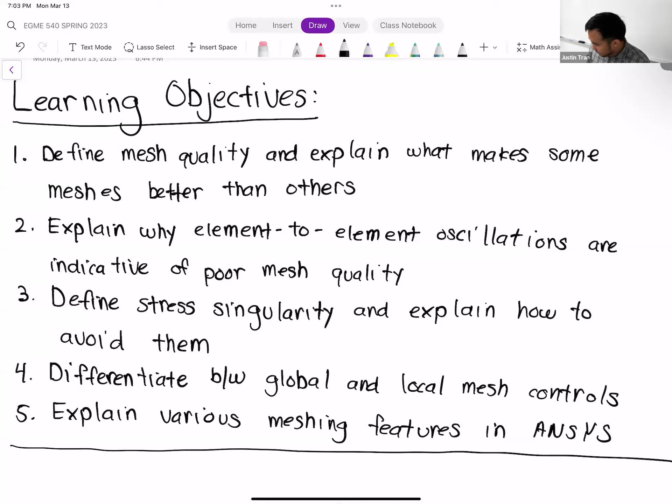Okay, let's go ahead and get started with the lecture. So today we're talking about advanced meshing.

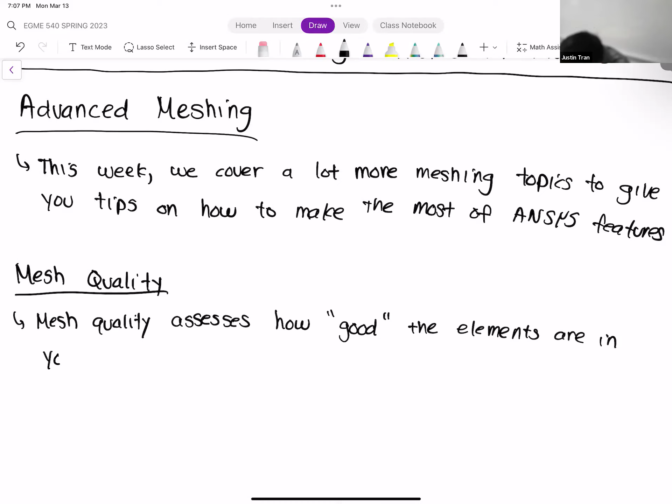Mesh quality is a metric used to assess how good each of your elements are. It's an element by element metric—when you mesh a geometry, you produce thousands and thousands of elements, and each of those elements gets a score of how good it is. Generally speaking, you want elements that are roughly equilateral in shape, with dimensions that are roughly the same in all directions.

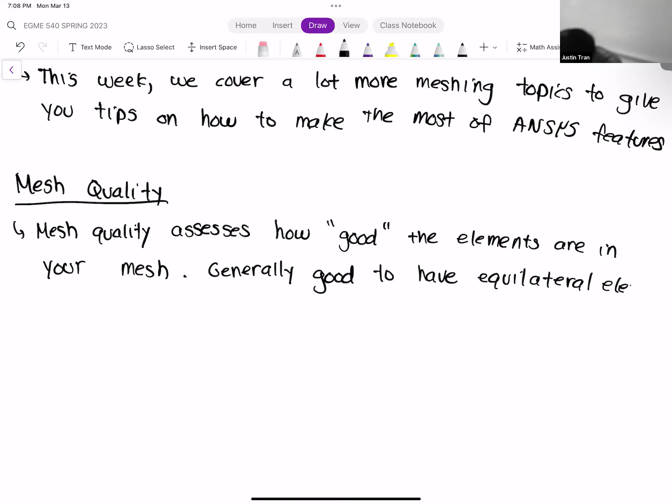So generally speaking, if we look at a 2D triangle, you want one that looks like this, where all the sides are about equal length and all the interior angles are about the same as well. My drawing is not high quality, I can't draw straight lines to save my life, but this is a high quality shape of triangle.

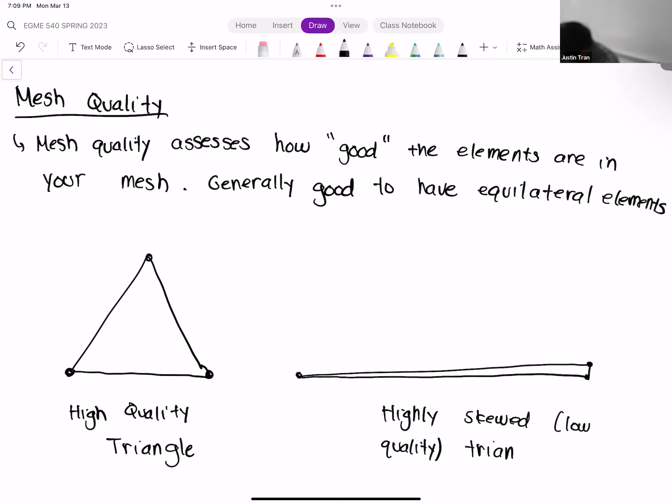And if you compare that to a very low quality triangle—we've already seen this—you may have a triangle that's highly skewed, something that looks like this. This is a highly skewed, low quality shape. The way we assess the quality of our elements is through a metric called skewness.

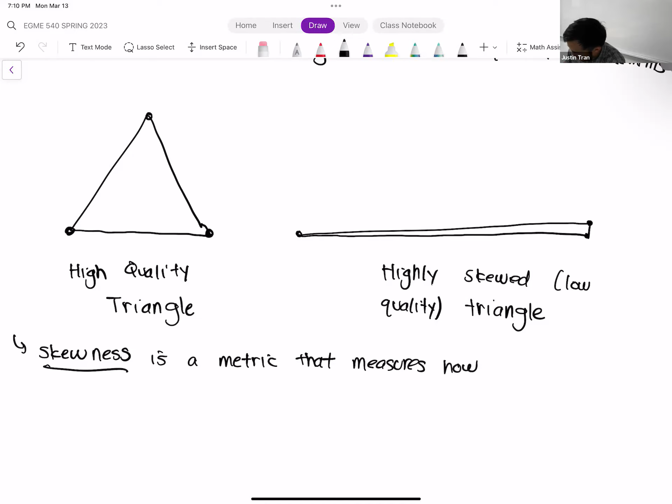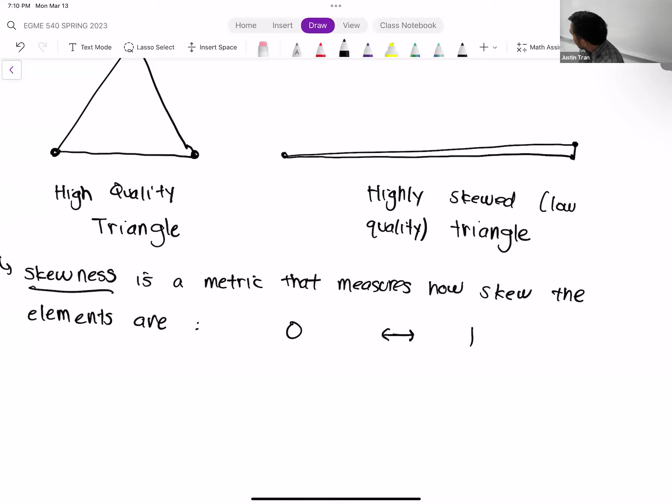Skewness varies from 0 to 1. A skewness of 0 means that your element is not skewed, so this is high quality, versus a skewness of 1 means that the element is highly skewed, generally low quality.

There are benchmarks and thresholds that people like to hit in terms of skewness. In ANSYS, they tell you the maximum, the minimum, and the average skewness. Different people have different opinions on the threshold for these. Some people say you have to have an average skewness less than 0.5, and a maximum skewness less than 0.95.

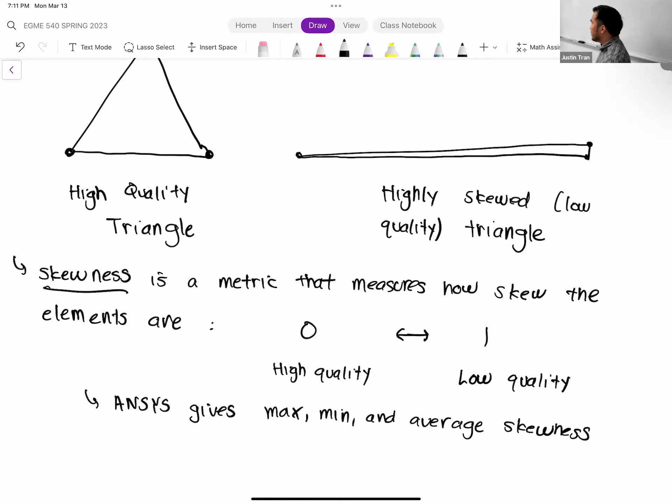The real answer, and I do have some numbers in the notes as well, is that the amount of skewness in your elements depends a lot on the mesh settings you apply and how good you are at applying them. But a lot of it also depends on the specific geometry you're looking at.

If you have a highly irregular, highly complex geometry with lots of curves, and you can't really do anything about that, you have to model all of it, so some skewness is going to be inevitable. You might have an element with a skewness of 0.99999, and you might wonder what to do about that. You might even have an average skewness that's over 0.9.

That's okay. It's fine to have some highly skewed elements, and on average it might be okay too. Skewness is not really a black or white test - it's not something you can use to just invalidate a mesh or say the overall mesh is bad. It's just a metric to tell you how your mesh is doing. If you're looking at your simulation results and seeing behavior you may not be expecting, skewness may be something you have to look at.

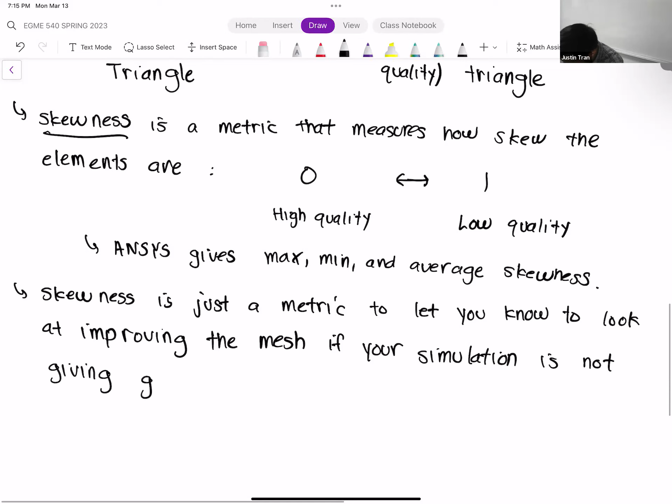So you may be asking, how do you know if a simulation is not giving you good results? I'm leaving that term vague on purpose, because a simulation not giving good results can mean a lot of different things. I want you to start looking at your simulation results and recognize certain patterns. If you recognize some of these solution features, maybe you should look at your mesh. That's what we're going to look at next.

The good thing about ANSYS is that, especially for a steady simulation, it's not that expensive to run. The most expensive simulation we've done in this class might have taken about 5 minutes, and in the grand scheme of things that's not long. So you have a lot of freedom to try a simulation, see how it runs, look at the results, and then go back and refine the parameters. That's a luxury you should take advantage of, especially when learning finite elements for the first time, because a lot of computational work comes down to experimentation. But you can't experiment without knowing what to look for or how to assess your results, so that's what we're going to do.

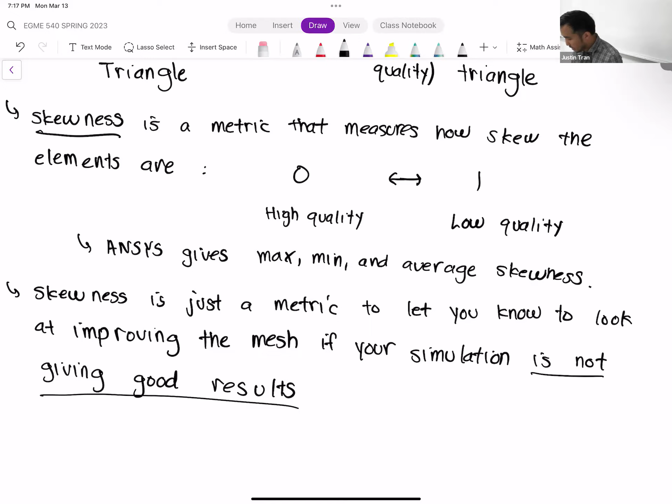So how do we assess whether or not our finite element simulations are good? One thing I always check in my finite element results is the results of my derived quantities.

Remember, derived quantities are solutions or things that come out of your finite element simulation that may not be computed right away. These are things computed based on the original solution.

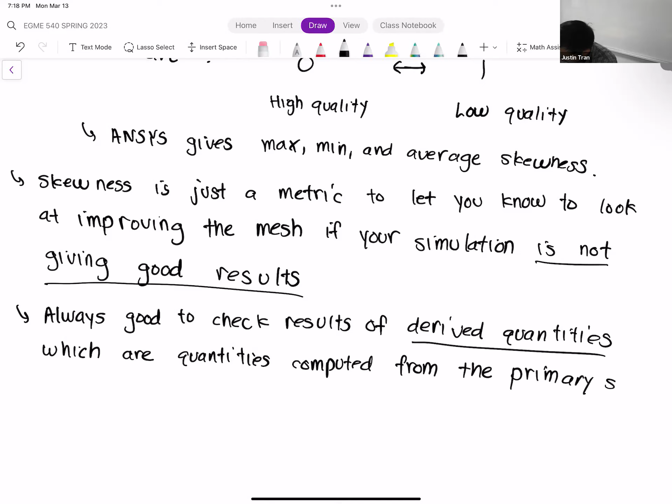The prime example of this, and the one we work with most in this class, is stress. Equivalent stress, principal stress, it's all the same, so you can check any of them. Strain is another good one.

If you're doing a thermal simulation, a good derived quantity would be heat flux or heat transfer rate. If you're doing a fluid mechanics simulation, you might look at shear stress, something like that. What's significant about derived quantities is that they're computed based on the derivative of your primary solution.

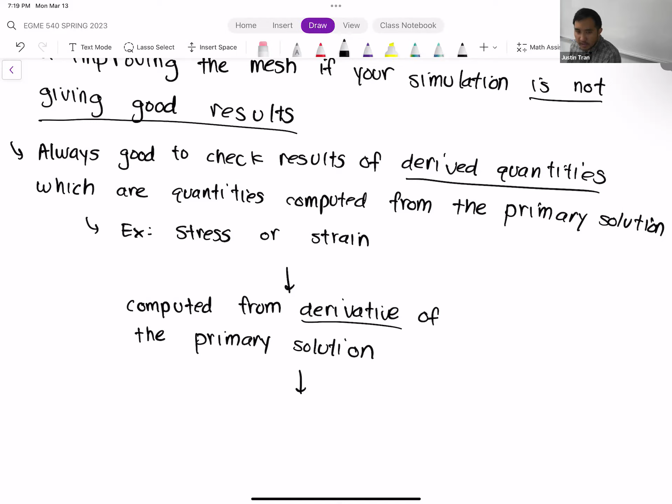The way derivatives are normally computed, it's not exactly like this within ANSYS, but it gives you the right idea, is with something called a finite difference.

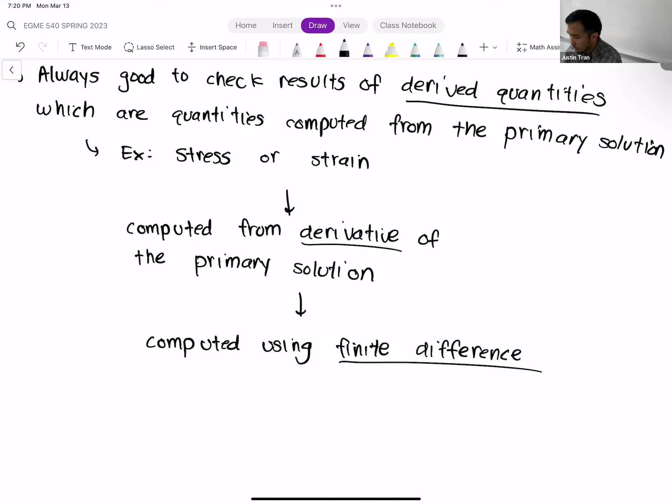The way finite difference works is that to compute a derivative, you basically take the difference of two solution values divided by the distance between the nodes. So let's say we have an element with nodes 1, 2, and 3, and I'll use temperature for now to keep things easy. Each node has a temperature associated with it: T1, T2, T3. Let's say this distance is L1, this distance is L2, and this distance is L3. Now let's say we wanted to compute the derivative dT/dx.

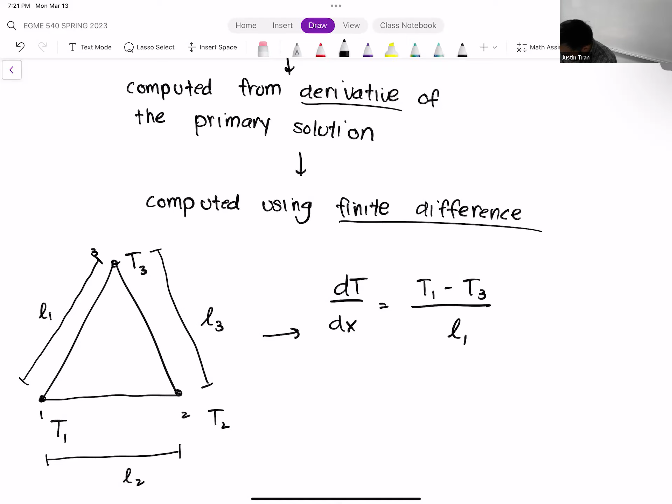The way we compute this is through a combination of the nodes in this element. So we do something like T1 minus T3 divided by L1, taking the x component of this, plus T3 minus T2 divided by L3, plus T1 minus T2 divided by L... it's not exactly like that, but you get the idea. Generally speaking, when you compute a derivative, you take the difference of the nodal solution values and divide by the distance between them.

Dr. Tran, is this the only method that ANSYS uses to compute the derivatives, or are we allowed to change the methods, such as from finite difference to finite volume? Or is that just instilled in the software, the finite difference method?

Yeah, it's not exactly like this, and ANSYS definitely uses a more sophisticated method, but I'm using this as an example to show you, because I'm going to tie this back to skewness and why skewness has an issue with this. So ANSYS definitely uses something more sophisticated than this, but this gives you an idea of what's done.

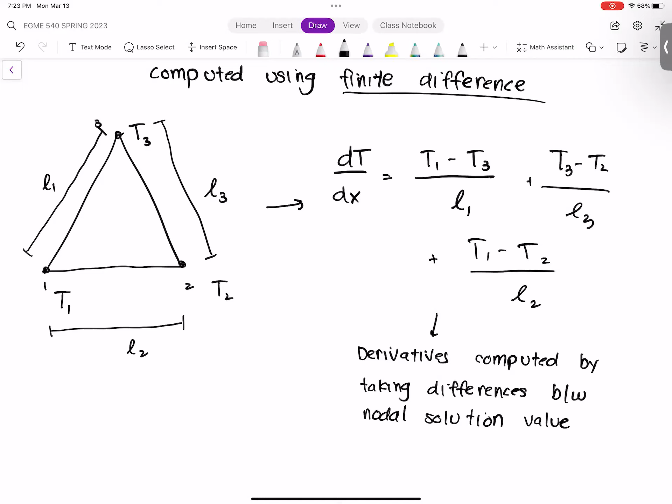Sounds good. Yeah, it's probably in their manual somewhere, and there's probably something you can change within the ANSYS interface itself. I'm sure they have a couple of different methods for it as well.

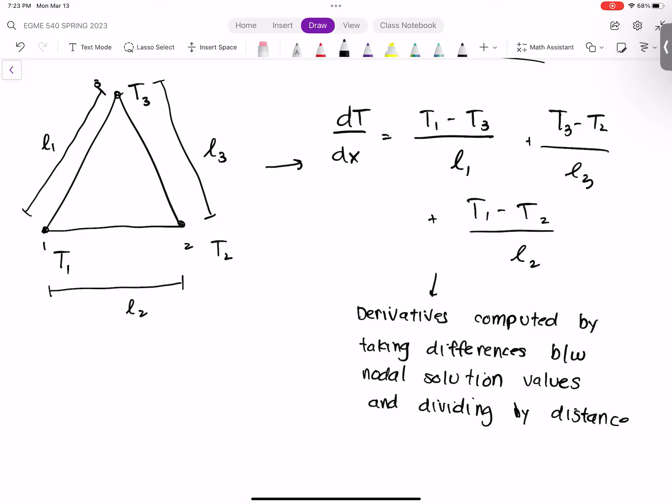The important feature I want to highlight here is that whenever you're computing a derivative on an element, each of the nodes should ideally contribute equally to the derivative. That's why it's important to have an equilateral element, because then each of these terms will have roughly the same magnitude, so they're roughly the same contribution.

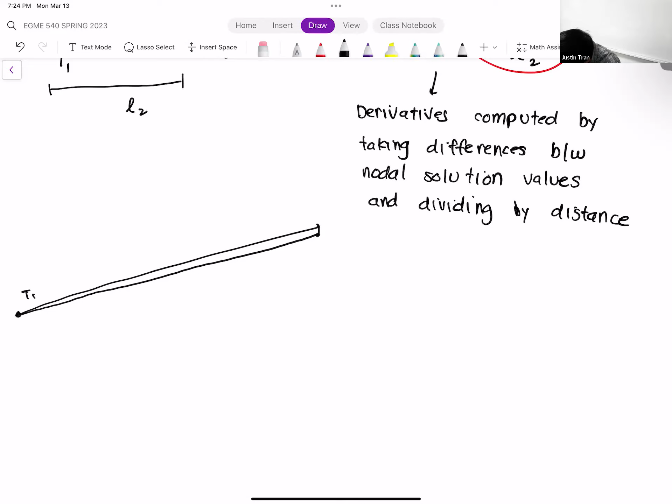If you have a highly skewed element, we compute distances as well. So let's say this distance is L1, this distance is L2, this distance is L3. For a highly skewed element, you have some lengths that are significantly bigger than the other ones.

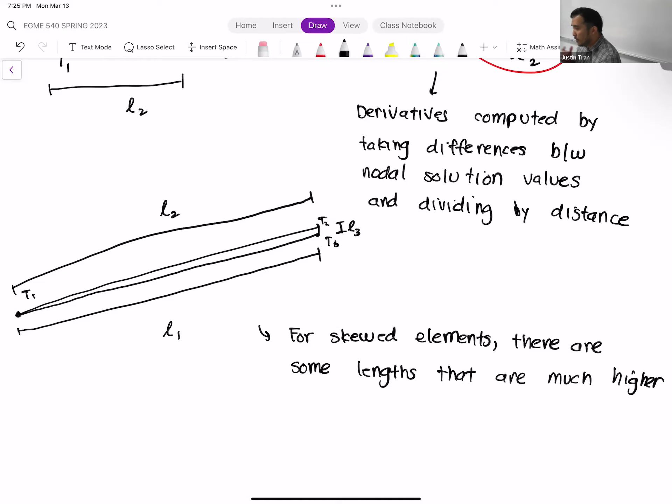Thus, when you compute the derivatives on these elements, you're going to have a very lopsided affair. If you're going just based off the distances, since L3 here is much smaller than L1 or L2, any derivative that involves L3 is going to be much higher in magnitude, because L3 is in the denominator. In certain situations, that's going to dwarf any contributions for T1. So any derivatives that involve T1 are basically going to be non-existent, because its derivative is going to be much smaller.

And that's not good, because if you're computing something like a derivative, you want to make use of all the information that your element has to offer, in general.

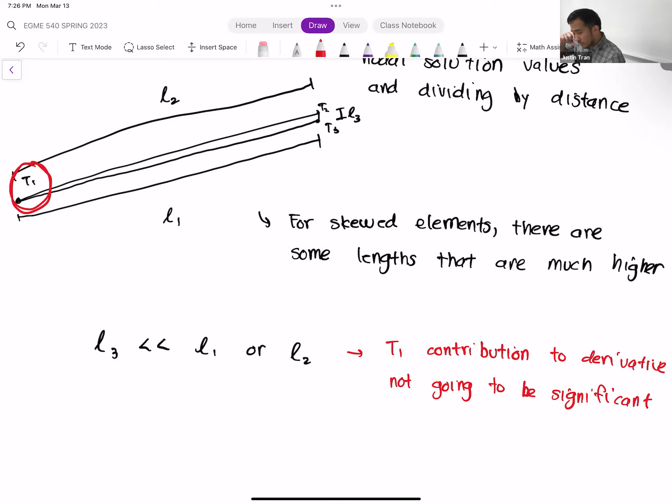Sometimes this may not be an issue - maybe there just isn't much variation in the T1 direction. So even though it's a highly skewed derivative, maybe your derivative is still going to be accurate anyway because of the physics of the situation. But these are generally situations you want to avoid, so you want to try to make use of all the information that you can.

Because even for the best element out there, the quadratic hexahedral, you only have 20 nodes of information. When you compare that to your entire mesh, which may have hundreds of thousands of nodes, that's not a lot. So you want to make sure you try to use as much of the information as possible.

Any questions on this?

So that's one issue that skewed elements have - when you compute derived quantities on skewed elements, it can be unreliable. Another issue that skewed elements have to deal with is if you have high solution gradients. If your solutions are changing very rapidly in the neighborhood of a skewed element, it may be difficult to capture that.

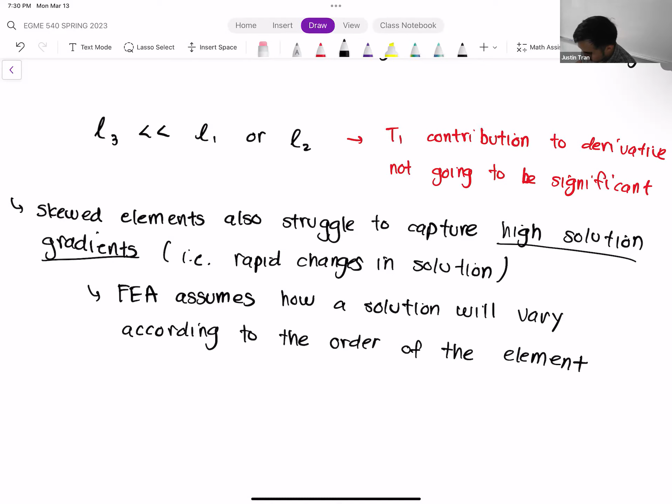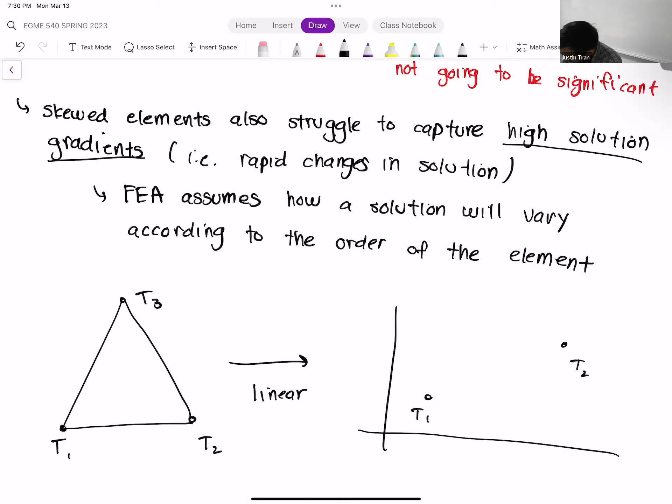And so let's even start with the equilateral triangle. Let's assume that we have a linear element. If we were to graph the variation between T1 and T2, you're basically assuming that we have a linear line - so we go from T1 to T2, and there's a linear variation between the two.

So that's fine if T1 and T2 are quite close to each other in value. Let's say T1 is like 25 degrees Celsius and T2 is like 25.1 degrees Celsius. I think having that linear assumption is okay.

But if the distance between T1 and T2... our question, can you remind us what order of element is? Yeah, so the order of an element is basically the order of the interpolating polynomial. Whenever you have an element, we have this shape function that approximates the solution within the element. So a linear element will have a linear polynomial associated with it.

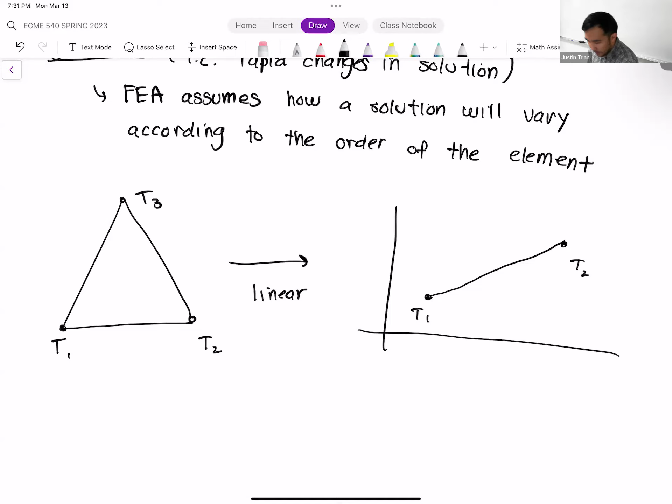And so this is fine if T1 and T2... when you don't have very strong variations in your solution, having a linear approximation is fine.

But there are situations where your solution is going to vary rapidly in that short period of space.

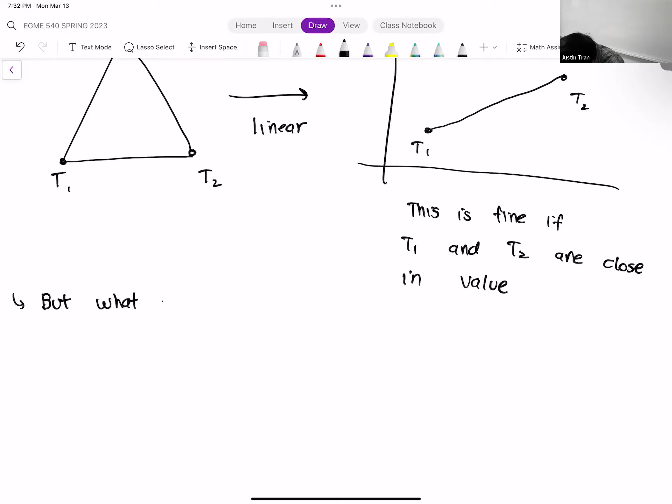Let's say that you have a situation that looks like this. And even for an equilateral triangle, this effect is definitely made worse for skew elements, but you can even have this effect for equilateral elements as well.

So let's say that we have a situation where T1 and T2 vary very rapidly across space.

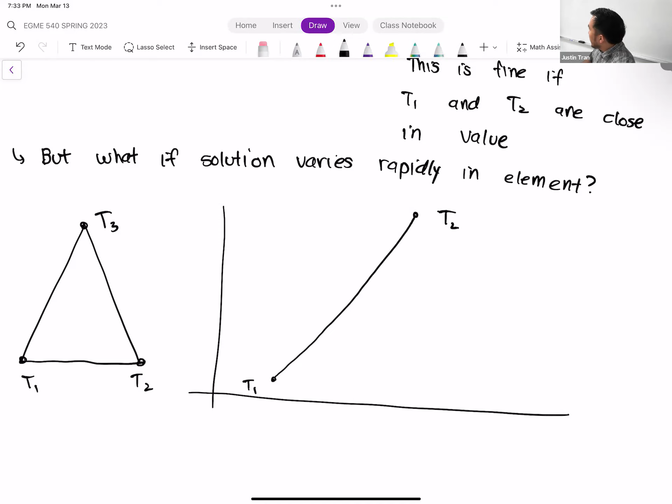With the linear element, we're going to assume that the variation between T1 and T2 is purely linear. But maybe the true solution is not like that. Whenever you see a high solution variation like this, you always ask the question: what if the variation doesn't look like a linear line?

Right, so maybe what if it looks like this? Maybe it starts out small and then ramps up very quickly at the end. Or even crazier, maybe your solution pops up and down like this - starts out really high, goes down low, then comes up like that. So a linear line is not going to be able to capture all these different variation patterns.

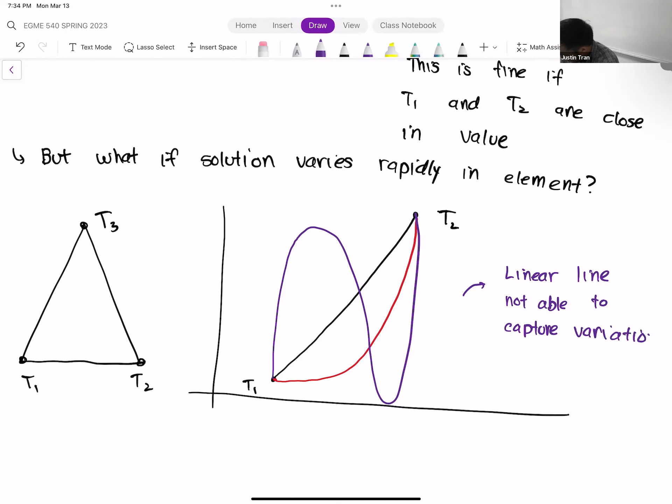So let's take this issue of high solution gradients and then throw a skewed element on top of that, where your derivatives are going to be even more crazy - computed even more wildly. Let's just say.

And so what results from this, what you visually see in terms of your results, is that you might see things like the stress jump or oscillate between elements. So it might be very high in one element, and in the very next element it might be very low, and it kind of jumps in between.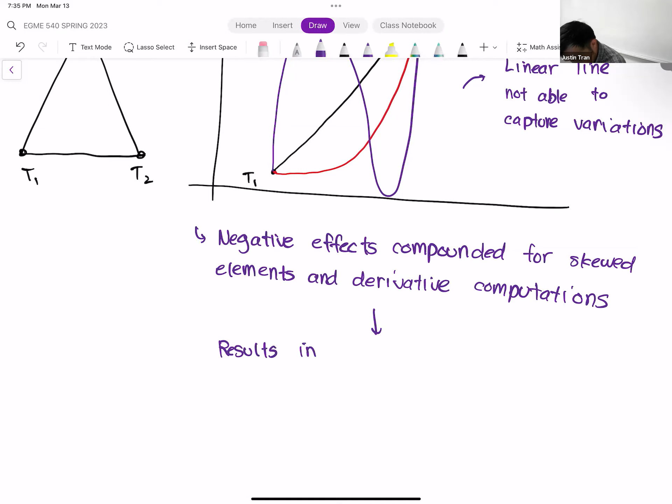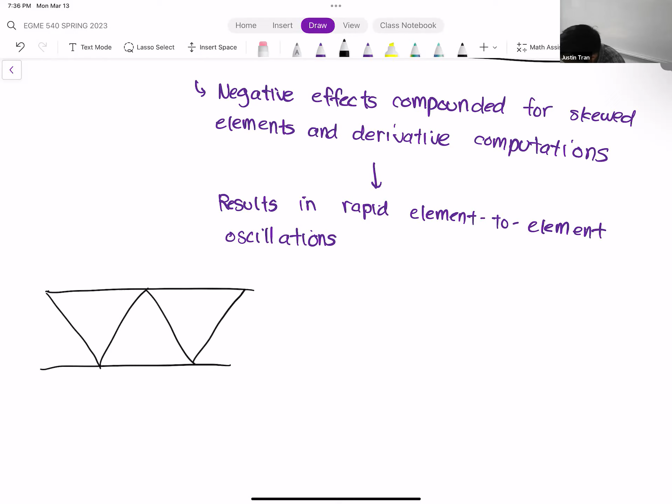So maybe you have a situation like this - maybe elements look like this. Maybe this is just one layer of the mesh. But then in this layer, maybe you have high stress in these elements. But then right next to it, you have a deep blue for low stress. So the blue here represents low stress, and the red represents high stress.

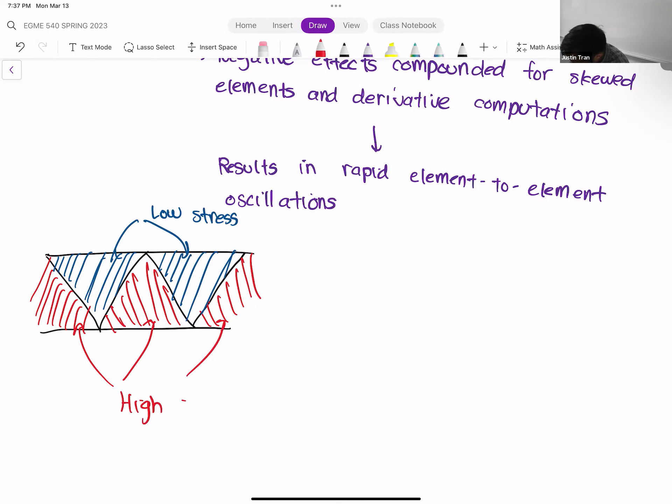And so you see this kind of jumping of solutions. If your solution is that extreme, then that is definitely a cause for concern. A lot of times you're not going to see it to this extreme, but what you will see is that the solution changes colors very abruptly.

So that's always one metric that I look for when I'm looking at finite element simulations. One good eye test you can use is that if you look at something like your stress distribution or even your deformation distribution, you should see a smooth variation - a smooth transition of colors. And even if you have an area where stress is highly concentrated, if you zoom in on that part, there should be enough elements in that area so the solution transitions smoothly between colors.

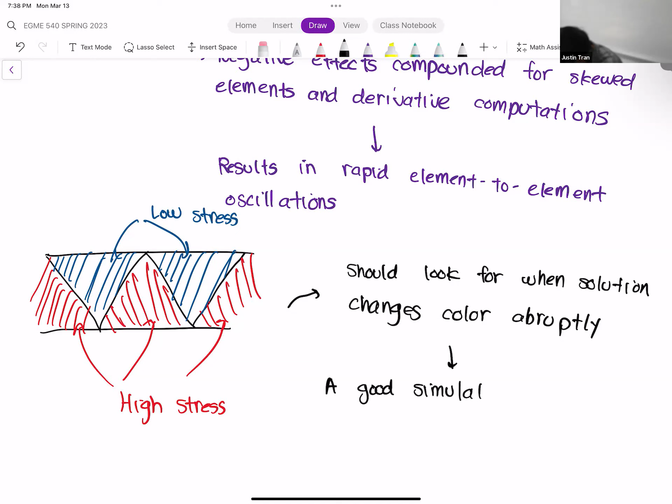Dr. Tran, so what you're implying here is that if we run an FEA simulation and there's no quote unquote blending, we should take notice and see if anything is wrong.

It's definitely something you should look into. One thing you can do, probably the easiest thing, is just refine the mesh in that area. Go to that area of the mesh and just make the elements smaller. That should definitely help with the transition. And if that doesn't help, maybe you start looking at the quality of the elements.

You look at the skewness and see if there's anything you can do to fix that. Maybe changing your methods, maybe changing the element shape in that area. Those are things that might help.

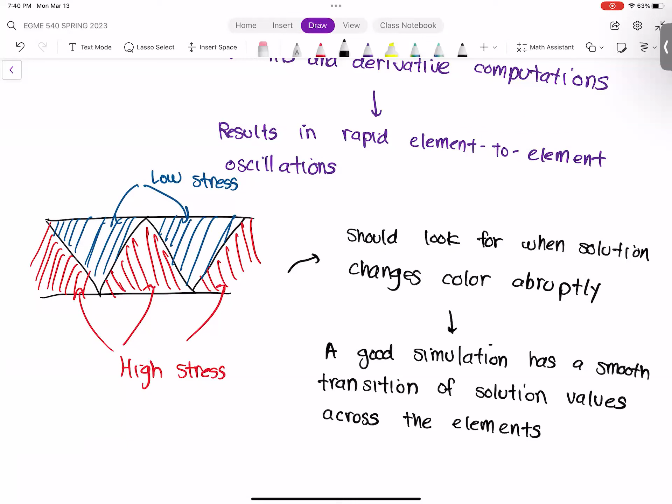So from someone who has experience with FEA, that's not appealing, having areas of high... how do I, if there's strong differences in color and there's no transition, um, someone with FEA experience would say that simulation could be optimized to include a transition. Is that what you're saying?

I would definitely look into that. I would start by refining the mesh in that area, because then I start to question: is that peak stress really due to the loads that I'm applying, or is it due to the mesh not being good quality in that area?

I see. Sounds good, sir. That somewhat helps me understand. Thank you. So just refine the mesh if need be.

Yes, refining the mesh is just kind of good in general, because it not only makes the mesh elements smaller, which helps with accuracy, but it also helps make the elements higher quality in that region as well. So refining the mesh in those areas is usually good.

Sounds good. Thank you, sir. Mm-hmm. Yep.

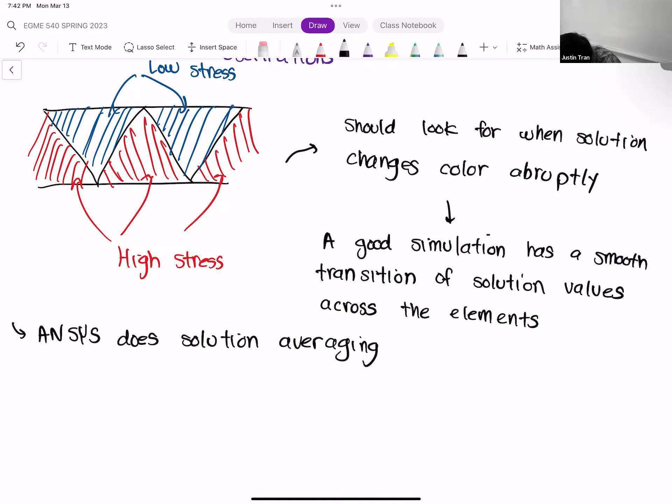Because ANSYS knows this too. ANSYS knows that when engineers are looking at their finite element solutions, they're going to take those solutions and present them to their boss, or they know that a lot of students are taking these courses and will be presenting their simulations to the instructor. And they know what people are looking out for are things like this.

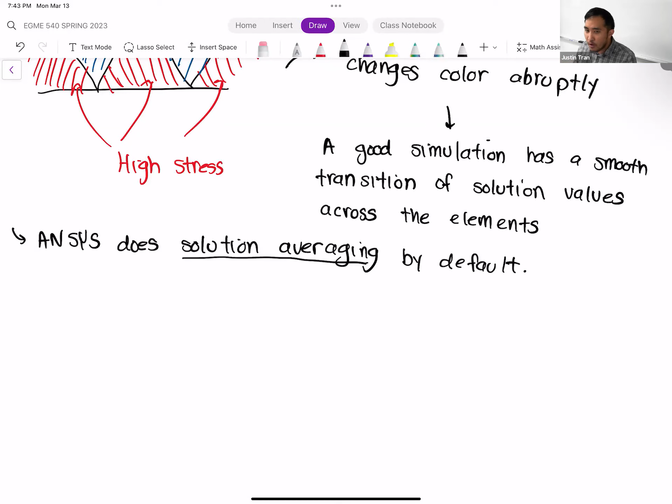So you want to see smooth transitions of your solution in general. ANSYS does something that visually makes it look like the solution is transitioning smoother than it actually is. What it does is take the colors you see in ANSYS not on a pure element by element basis, but as kind of an average of all the elements around it.

So naturally, whenever you're doing an averaging process like this, it's going to smooth out the solution, it's going to smooth out the signal, right? Things like a low pass filter kind of work in a similar way. So this is good if you want to produce a smooth looking solution. The fact that ANSYS does this is nice.

But sometimes you don't want to get a smooth looking solution. Sometimes you want to find the issues in your model and fix them, right? And if ANSYS is doing this automatic, purely visual change that has nothing to do with the solution itself, it can be harder to actually find the issue.

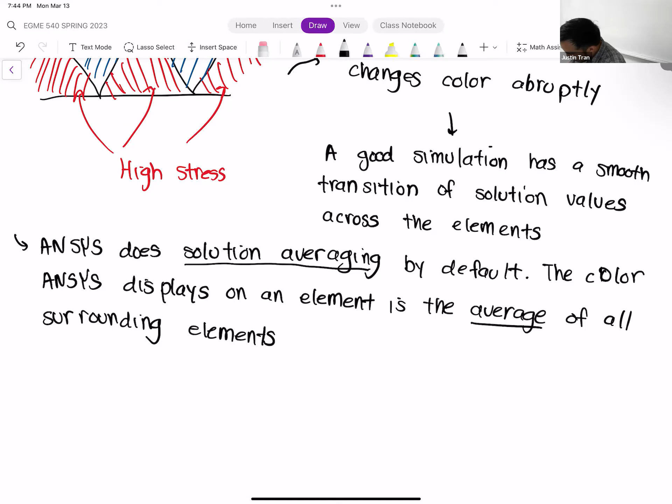So one thing you can do is turn it off. When you're viewing your solution in ANSYS, you can view what's called the unaveraged stresses.

By viewing the unaveraged stresses, you'll get a much better idea, a much clearer picture, of how high quality your mesh is and whether you're having these element-to-element jumps or abrupt changes in color. Better yet, ANSYS also has an output setting called structural error.

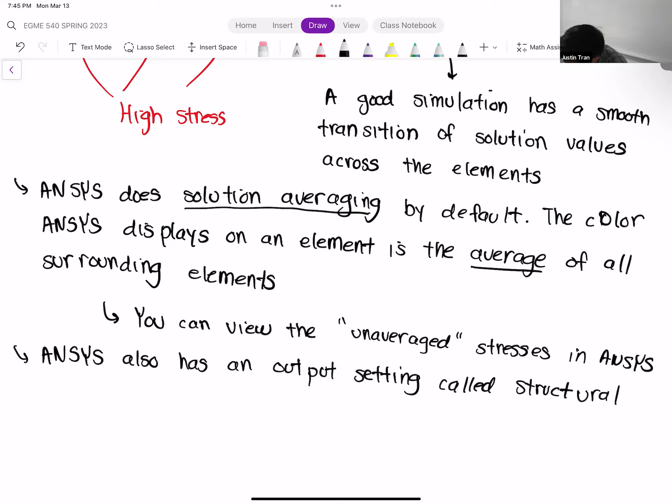This is one of the output fields you can get, alongside things like total deformation or equivalent stress. The structural error shows the difference in the strain energy field between the averaged and unaveraged results.

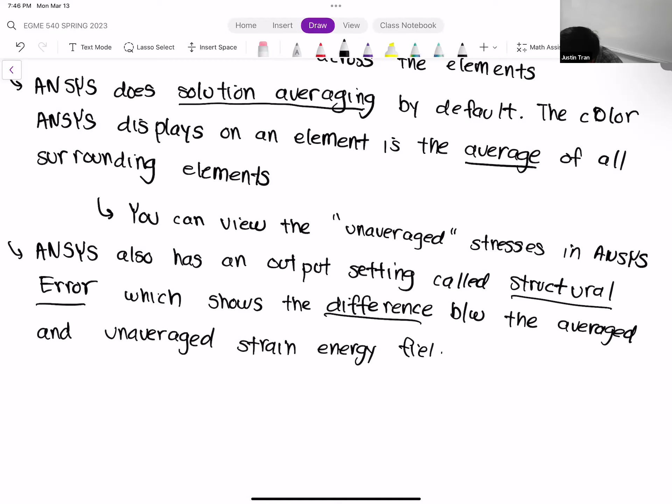Generally, if your mesh is good quality, you shouldn't see many differences between the averaged and unaveraged results. Because if you have smooth transitions in your unaveraged results, then averaging isn't really going to make much of a difference since your transitions are already smooth.

So one way you can assess your mesh quality is to look at the structural error field and see if there are any significant differences. The best thing about this is that not only can you see if there are significant differences, you can see where those differences are, which gives you ideas of where you can improve your mesh.

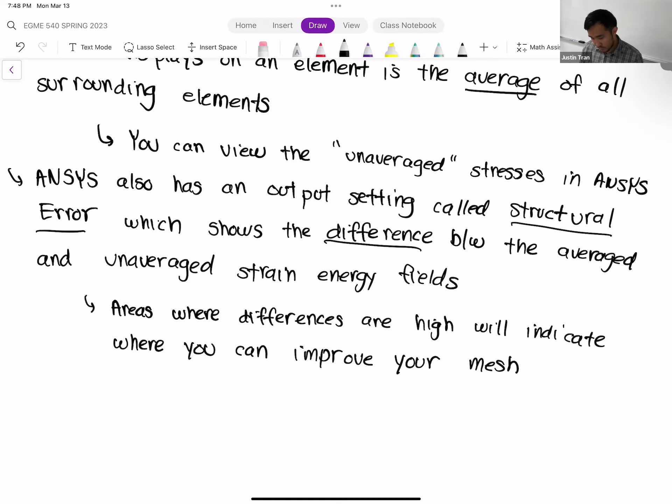We'll go through this in the next activity, where I'll show you how to use the structural error to improve your mesh. Any questions on this so far?

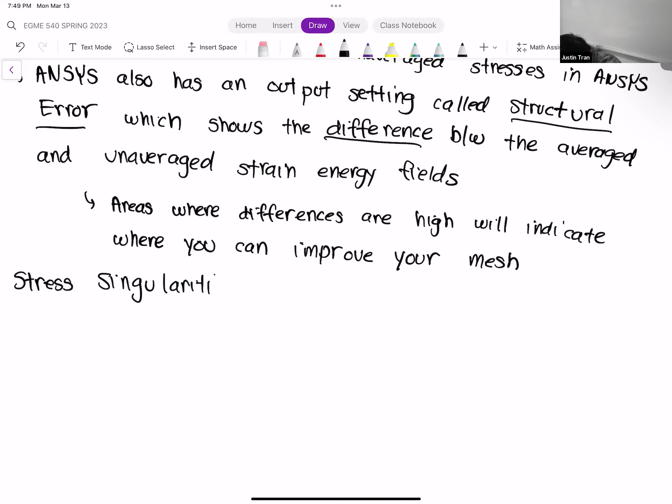So let's talk about stress singularities next. Stress singularities are another issue that you need to look out for when you're meshing.

The theory behind stress singularities actually has nothing to do with finite elements at all. If you follow elasticity theory, it predicts that when you have concave corners with small radii of curvature, the structural stress will concentrate in those areas.

The most extreme case is when you have a perfectly perpendicular corner. For a perfectly sharp corner, the radius of curvature is 0, and elasticity theory predicts that the stress there will be infinite.

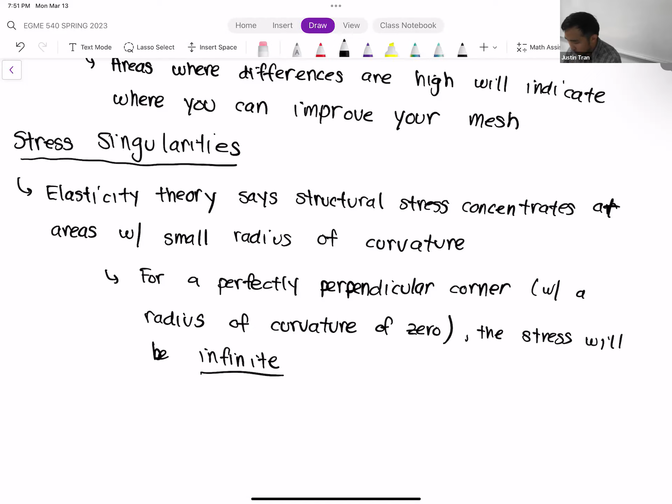So if you have a sharp corner like this, we're going to have a very, very high stress at this corner, assuming that this model is undergoing a structural load.

Dr. Tran, for that drawing you made there with the sharp corner — this is more of a solid mechanics question — would that be okay, or would an engineer want to make that corner round to handle the high stress?

Oh yeah, normally you want to avoid situations where you have sharp corners like this, especially for any kind of load bearing structure. Pretty much day one of structural engineering will tell you need to round it out and smooth it. Good question.

What's interesting, and why this is relevant for finite elements, is that you see the exact same behavior in FEA. If you're working with a geometry that has a sharp corner, you're going to see stress concentration there.

And this is relevant for meshing because, remember, we talked about mesh convergence tests — you basically keep refining the mesh until your stress value or deformation converges to a steady state value. The thing is, with a sharp corner like this, you can refine the mesh all you want.

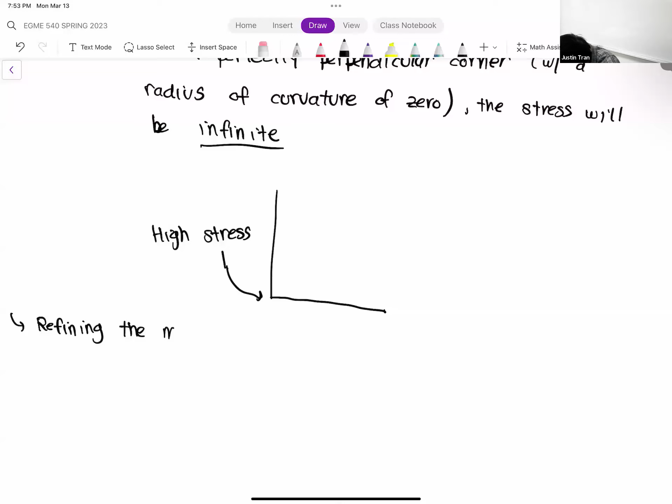You can refine the mesh until your computer starts crying out to you, and you're never going to get a converged value of stress. It will keep amplifying it as long as you keep refining the mesh.

The reason for that is very interesting. Whenever you overlay a mesh onto an object with a very sharp, small feature like this, the mesh naturally smooths it over because it's basically trying to fit an element to that sharp corner.

Let me draw another example. Say we have a Pac-Man looking shape, and we want to put a mesh on it. If we use a triangular mesh, it might look like this. Let me get to this corner right here and write it a bit better so you can see.

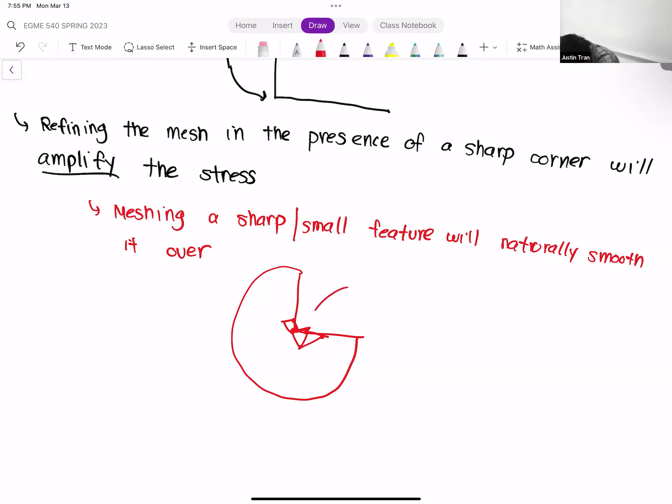Sometimes it's very hard to see, but a lot of times you just need a subtle change. In the worst possible case where it's perfectly perpendicular, you really will get infinite stress - that's how it's predicted. But meshing kind of helps you avoid that, ironically. Meshing actually makes the solution not as bad, but as you refine the mesh, that smoothing goes away. As you refine the mesh, you capture your geometry a lot more accurately, and any kind of smoothing like this is eliminated.

When you have sharp corners like this, you want to be careful about your mesh. If possible, hopefully you're not in a situation where you have to run an FEA on a sharp corner like this. If you can, go back to the CAD model and try to see if you can smooth out those corners. You add a fillet or maybe a chamfer - something to smooth it out so you don't have this perfectly perpendicular angle.

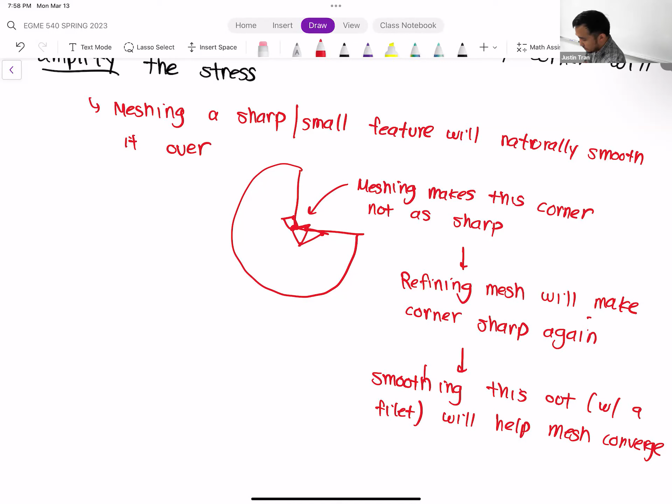So an interesting story - activity 3, I know everyone's turned that in already. Activity 3 actually used to have a sharp corner like this, basically where the signpost attaches to the ground. My students were seeing this exact phenomenon occurring. They would go to activity 3, refine the mesh, keep refining it until you can't even see the elements anymore, but they would still see their stress just keep climbing and climbing. That's because of this kind of sharp corner feature.

Since then - this is a change I made maybe about 2 years ago - I added that fillet at the base of the signpost. Now you have a much better chance of getting a stress value that actually makes sense.

So definitely be careful of that. When you run simulations, generally we look at the maximum and minimum stress - you want to look at where the maximum stress is occurring. So if it's occurring at a corner, maybe your issue doesn't really have to do with the mesh, it has to do more with the geometry. Definitely be on the lookout for that.

All right, any questions on this?

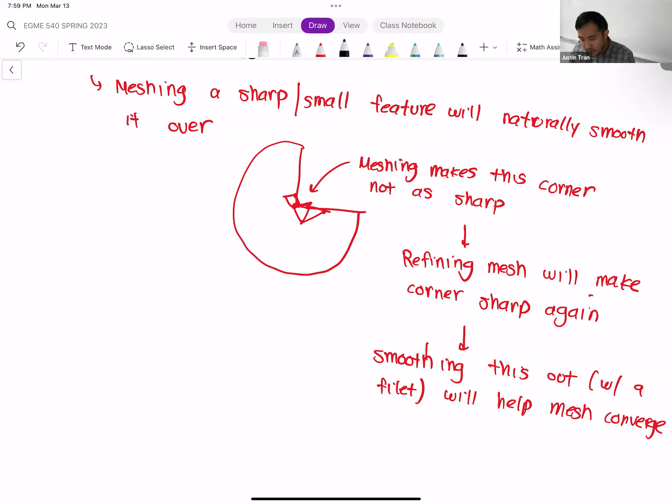Okay, so for the last 15 minutes today, I wanted to start talking about some of the more advanced mesh controls within ANSYS and what they actually do.

So first thing I want to talk about is the difference between global and local mesh controls. Global mesh controls - I give it the name global because it applies to the entire mesh. So when you apply the global mesh size or the global mesh order, that's going to apply for the whole mesh.

The way that you can access the global mesh controls is through the mesh itself. If you remember in ANSYS, when you create a mesh, there is a top of the tree mesh object. When you create things like sizing and methods, those go underneath the mesh. But if you click on mesh itself, you can set things like the size, the order from that.

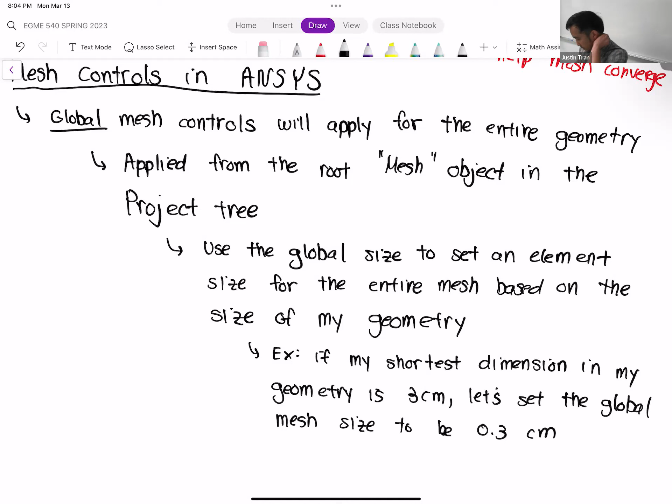So let's set the global mesh size just as a starting point to be 0.3 centimeters, just to make sure that one dimension doesn't get forgotten, so we have at least enough density in that direction.

Another setting you can do also has to do with size. Maybe your geometry is quite complicated and you can't really sum it up in terms of a raw dimension. There's a global mesh setting called resolution, and it's almost like the same thing, except it kind of simplifies it.

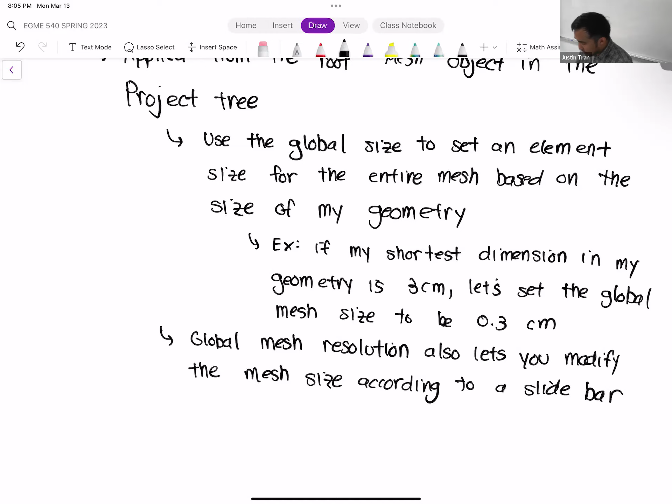The way it does that is according to a slide bar. The different resolution settings go from 0 to 7, so you can set it to be 0, 1, 2, 3, 4, 5, 6, or 7. I don't know why they chose 7 — it seems kind of an arbitrary number.

Basically, the way the slide bar works is that if you put the resolution down to 0, you end up with a mesh that's quite coarse. But if you put the slide bar over to the other direction, to 7, you end up with a very fine mesh.

So for situations where you don't want to fuss, where you don't want to set a direct size to the element, you can use this resolution slider to kind of do the same thing.

This is also useful if you want to do a very basic mesh convergence test. You can start with a coarse mesh, run your simulation, then increase the resolution one by one to see if your solution will converge by the fine mesh.

If you're curious about how ANSYS selects the size, I think they have some kind of algorithm based on the geometry of your object. I haven't looked into it, but I'm sure it's in their manual. If it works the way I think it works, it looks for the smallest surface in your model and chooses the mesh size based on that — basically, how many elements do you want through that face. I know that's how these things work in other softwares I've used.

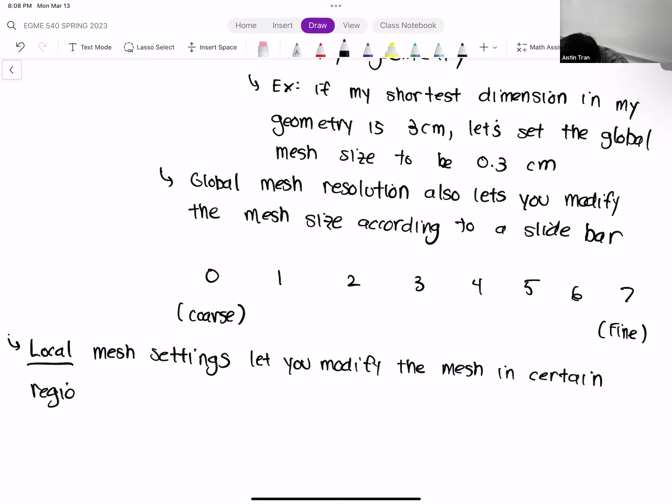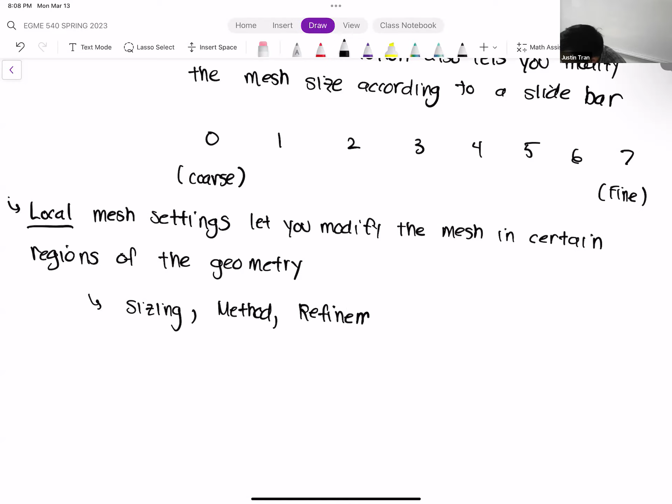This is what we've been using mostly in our activities, specifically activity 3. With local mesh settings, you'll be able to make things like sizing objects, method objects, and refinement. Those are just three examples, but of course there are a lot more settings you can do.

If you remember, when you made a sizing object or a method object in ANSYS, you had to select a certain section of the geometry, whether it be a surface or a part. That let you apply the mesh in those areas.

What's important to remember is that whenever you apply a local mesh setting, whether you're increasing or decreasing the mesh size, local settings will always override the global settings.

Whenever there's a conflict, the local settings always take precedence. One way to think about it is that the global settings apply for most of the mesh, maybe for parts that you don't really care about. But for the parts that you do care about, where you expect stress concentration to be, or where you expect the solution to vary a lot, you can use local controls to make sure you capture those well.

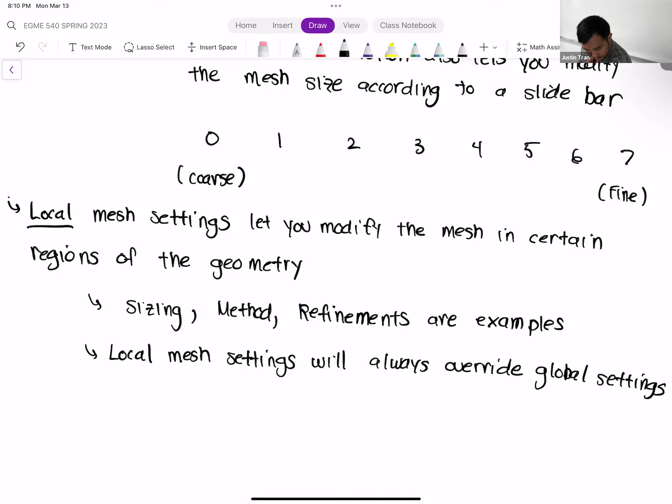So let's talk about hex dominant mesh. I think that's where a lot of questions during the activities have come from. If you want to get a hexahedral mesh on your geometry, this is the main way to do it.

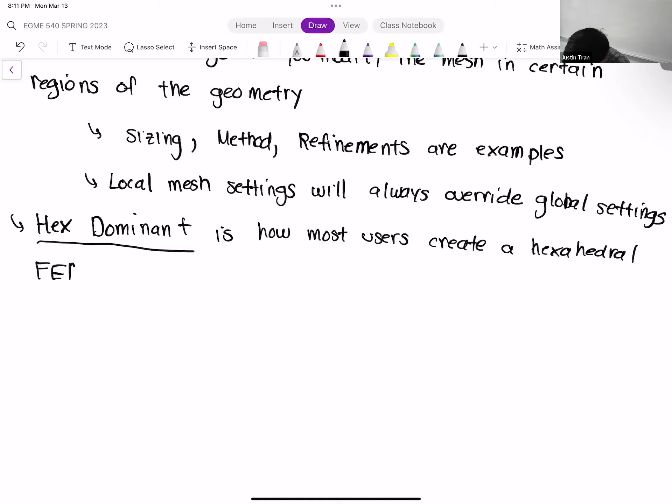Generally, if you're able to get a hexahedral mesh, that's desirable because they have better shape properties and better convergence properties. So a hex dominant mesh will always converge faster than a tetrahedral mesh.

But the tricky thing is that it's difficult to get a hex dominant mesh. It's still kind of an open question in the FEA community how to get a mesher to always produce hex elements. The way ANSYS does it is actually pretty clever: it first creates a tetrahedral and triangular mesh.

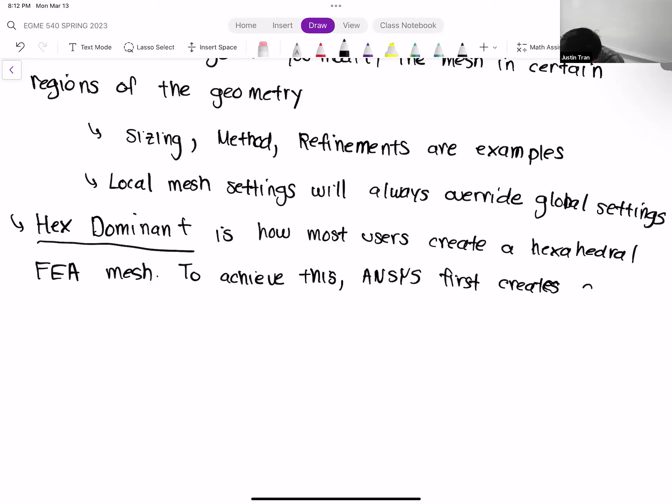So ANSYS actually starts out with not even a hex dominant mesh at all—it starts with kind of a regular mesh. And the good thing about a tetrahedral mesh is that, just like we said before, we know it's always going to work.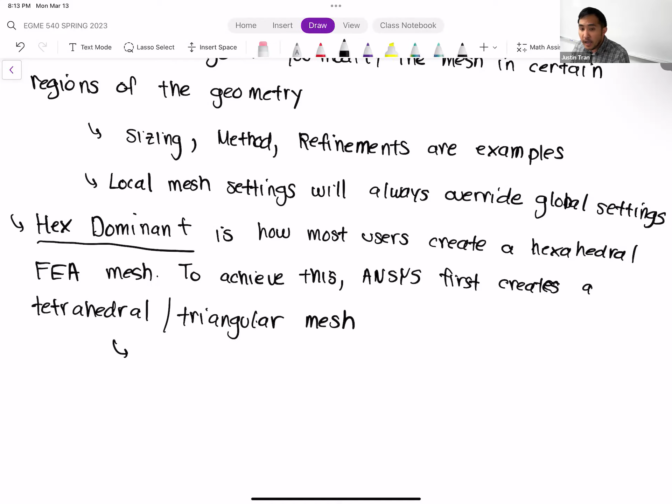Then what ANSYS does is, after creating this tetrahedral and triangular mesh, it attempts to merge together adjacent triangles to make a rectangular and hexahedral mesh.

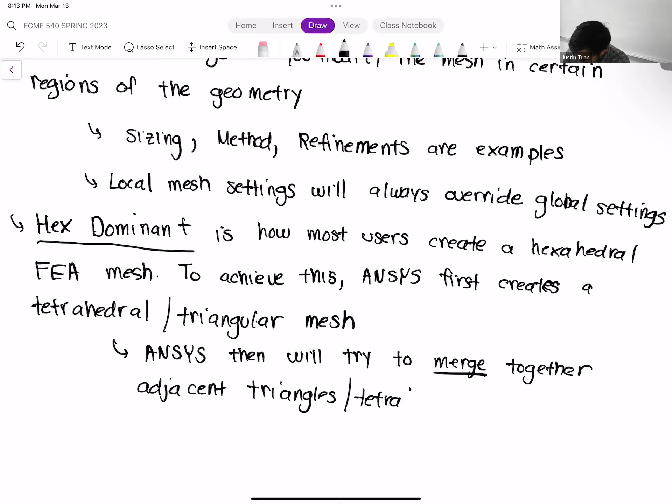So let's say we start with a mesh that looks like this—this is our triangular mesh. Maybe this is the mesh you have on a surface.

Then what ANSYS is going to do is try to eliminate some of the element edges to form a rectangular mesh. So maybe this edge eliminates this edge, it might eliminate this edge as well. It's not going to work everywhere.

So you'll have situations where you still have some triangles left over, but the idea is that most of the triangles or tetrahedrons get merged together. So maybe you end up with a situation like this: you have one hexahedral element, another one like that, but still one triangle on the edge. Same thing here—maybe one triangle and one big hex, just like this.

Of course it's not going to work everywhere. Some of you have noticed in your editions of ANSYS that it tells you the percentage of triangular or tetrahedral elements that are left. And sometimes it'll just flat out fail—it'll try to merge things together and you end up with a very skewed or weird looking element. That's basically when errors occur.

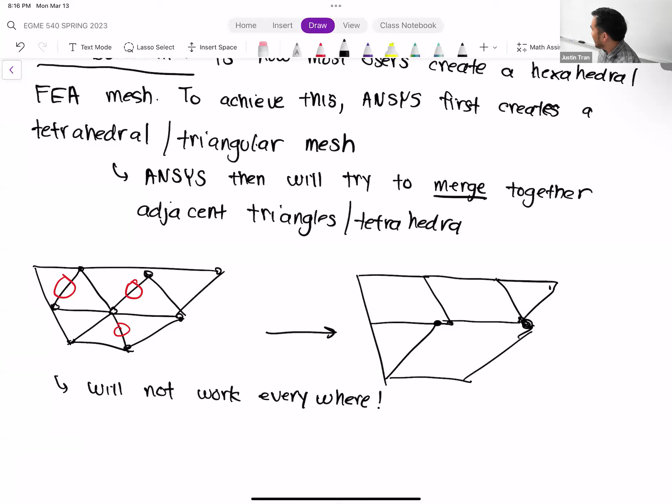Thank you, Dr. Tran. Thank you, Professor. Thanks, Ismail. Have a good day. You too. See you.